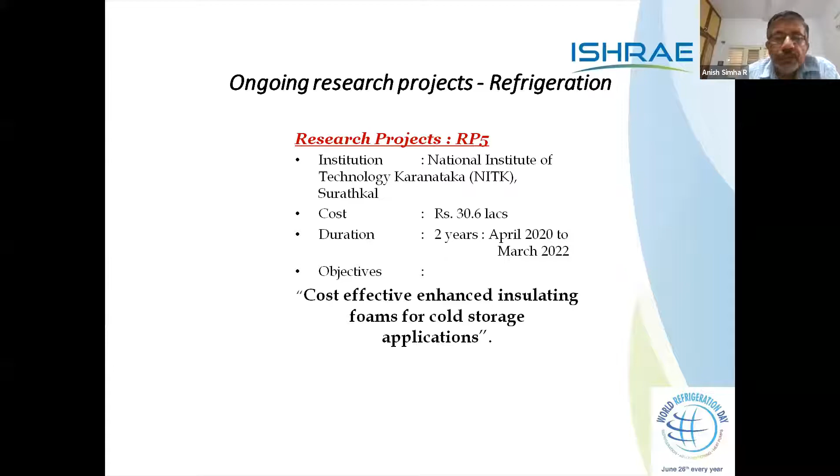So with this, now I would like to introduce the speaker of the day, Mr. Arun Kumar Bhatia. Mr. Arun Kumar Bhatia is from the TED Consulting Services. He is the founder and the technical head. He is an accomplished professional with 26 years in the industry with hands-on experience in industrial refrigeration, commercial refrigeration, project management, skill upgradation training, energy audits, and process cooling solutions. He has led and handled various projects with end-to-end responsibilities.

Member and follower of international associations, including ASHRAE, IIAR, TMI from USA. He is a Bachelor of Technology from the Mechanical Engineering Department from University of Kerala, India. He has a Master's in Business Management from Delhi. Then he has design of refrigeration systems for peak performance and efficiency from the University of Wisconsin-Madison, USA. He has attended skill upgradation training or workshops on sustainable solutions in global refrigeration industry from Mayekawa, Japan, GEA Refrigeration Europe, and GEA FES USA.

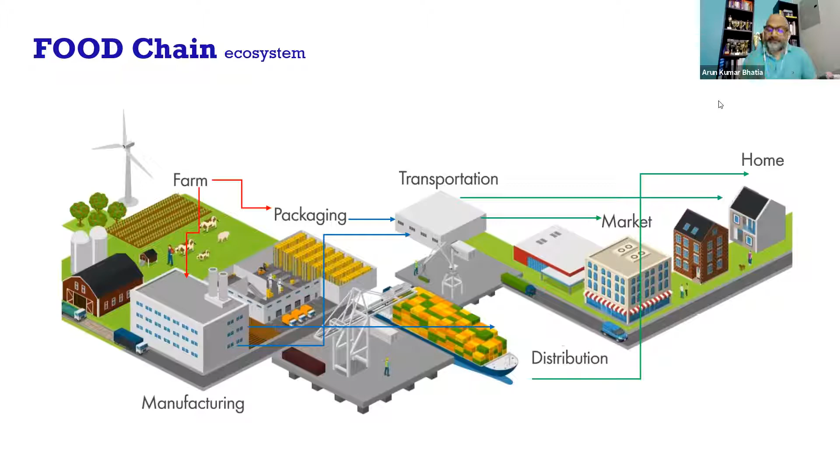Now this was about food. So food, as I said, food itself is energy. Many people recommend that you have to have this many calories and this much not. So even refrigeration is also about calories, kilocalories, watts, kilowatts, tons. So how does the cold chain ecosystem work? As per the United Nations Food and Agriculture Organization, they define cold chain like this: from harvesting to reaching a food outlet or a consumer, we should try to protect this energy chain in a manner that we have the least carbon footprint. We should have the most efficient operation without compromising on the properties of the food. When I say without compromising the properties of the food, it means we cannot afford to compromise on the temperatures of the food, because those are the most important criteria to maintain hygiene of the food. So temperature, movement and storage are the most important things in cold chain.

So if you start from the left hand side of the screen, there we have a farmer, fish farming or normal land farming. It is farmed and then it moves to a process factory or a packing factory, and then it reaches storage. So if on every step we maintain the respective or recommended temperature management, this will really help us to improve our food security, reduce carbon footprint and make this environment better.

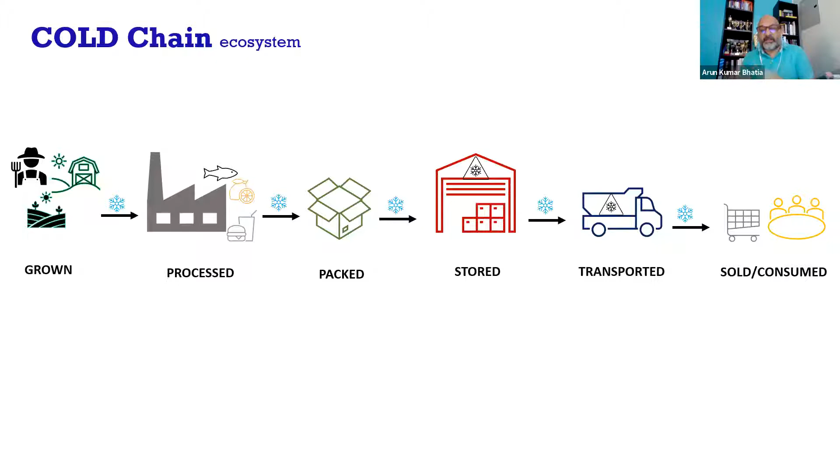So this definition was really awesome, which I learned recently, and if this has been understood, then I think most of the points are clear. This was in one of ASHRAE's blogs. The cold chain is a series of actions and equipment. So here we have to make a deep understanding of the statement, series of actions and equipment. A technology company can manufacture equipment, right? They can give you the most energy efficient equipment. If we are not able to install it properly, then that equipment becomes of no use. No use in the sense that we may end up consuming higher energy, or we may end up damaging that equipment at the end. We are not doing good for the environment.

So the cold chain is the series of actions and equipment applied to maintain a product in a specified low temperature range from harvest or production to consumption. When we say actions, these are our experience, our common sense, our best practices, which we have to apply along with the technology and equipment. So it is a balance of our knowledge, experience, and best practices along with the equipment and the technology. We will see how it goes.

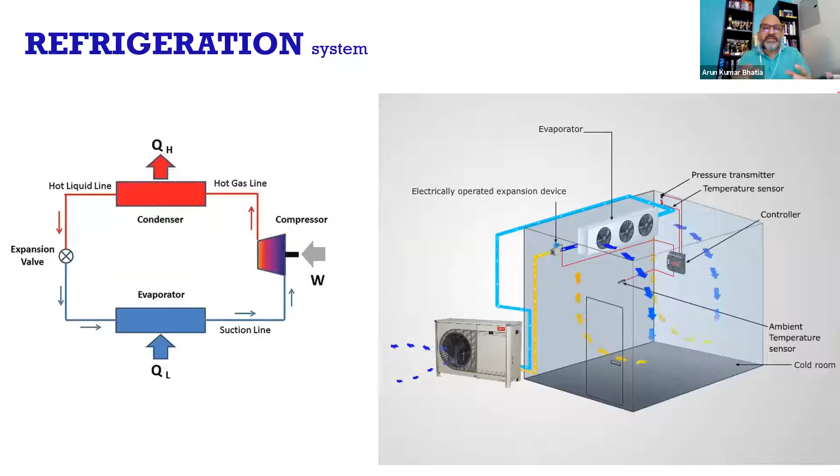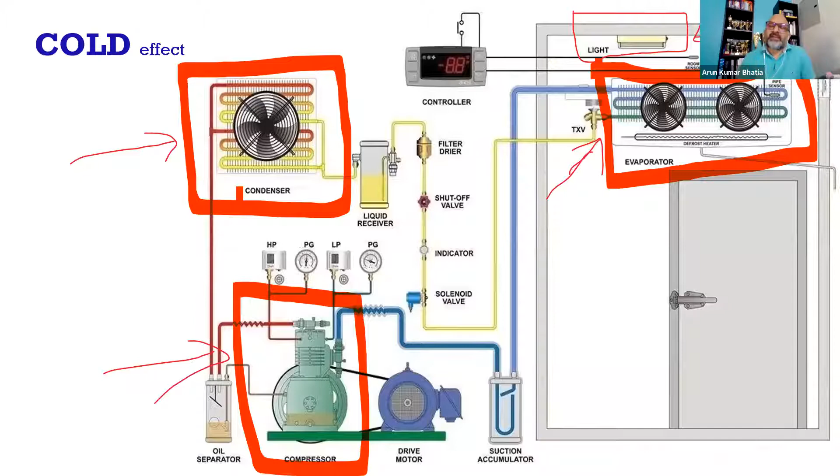But when we go into installation, establishing a cold chain, consulting, project sales, or as an investor investing money, we have to look deeper into the subject. It is not only the compressor and the fans where we can save energy. There are a lot of opportunities in the cold chain, in a cold store or in a processing factory, to save energy. As I said, for students it is the fans in the condenser and evaporator and the motor in the compressor. These are big opportunities to save energy. And of course, there are some lights which consume a minimum amount of energy.

Now I always love this statement, food and energy, because we are so connected with energy. It goes back to 7th or 8th class when we learned the law of conservation of energy: energy is neither created nor destroyed, but changes its form. So we are in a circle where energy is moving around us, and we have to optimize it. If we use energy inefficiently, it will create more carbon, and that is not good for human living conditions. So humans, food and energy are connected in a circle.

As I said in the beginning, food is energy and energy is food. It may sound like a cliche, but I like to understand it this way, because I feel the connection between food, energy and humans is very basic. These are the American dietary guidelines. They say the average woman and man need 1,600 to 3,000 calories a day, which they consume in terms of protein, carbs, fat, vitamins, minerals and water.

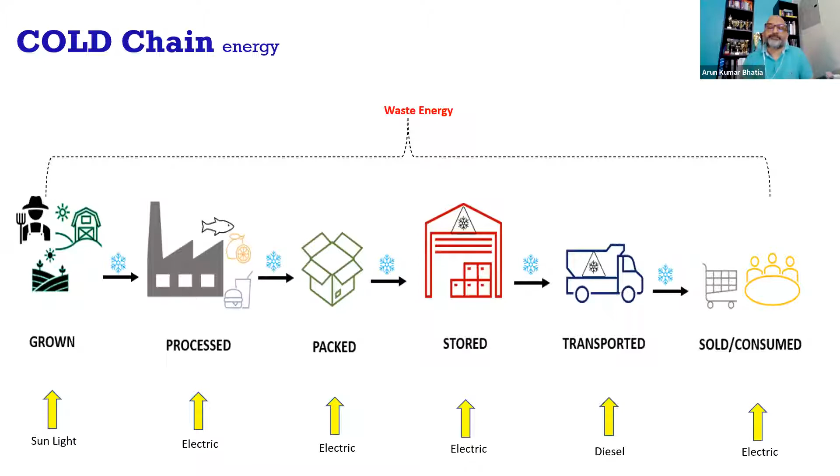So this is just some statements which say, and which is really alarming for us: in fact, up to 26% of world energy is used in food chain, directly or indirectly. I believe the number should be even higher, but this is the data I had from one of the United Nations websites. So this I have given you.

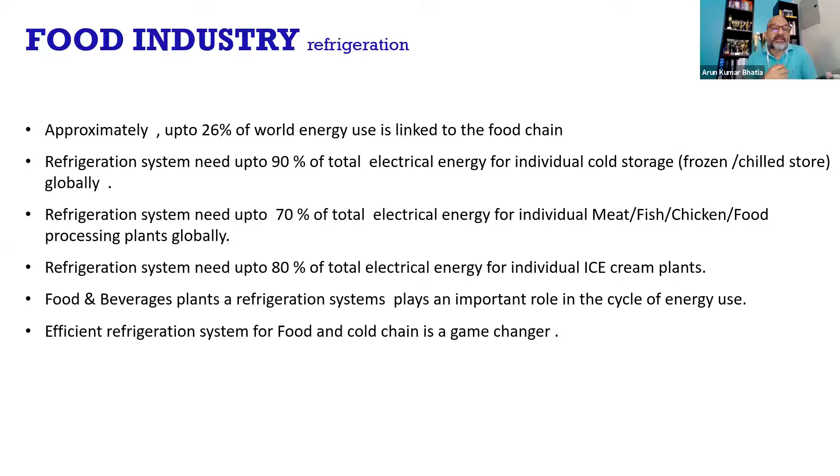Now, in a refrigeration system, for example a cold store, a third-party logistics warehouse with bigger frozen and cold chambers, 90% of the energy is used in refrigeration equipment. If you go further in the points, food and beverages use a huge amount of energy in their operations, and that is the reason we all believe our industry is the most energy intensive industry. And still we are in a developing country.

We don't have any greenhouse goals. If India has, then probably I'm not aware of it. And I think many companies I know in India have their own greenhouse gas goals. They want to reach the lowest carbon footprint. I have seen it in many companies' agendas, and even many contractors in the refrigeration industry maintain these standards.

But don't worry, this is for the students, those who are in college. I'm just trying to tell you, after 5 or 10 years, you will also go as a specialist, with a target for my cold store design, my cold chain and my food processing factory which I am involved with as a stakeholder. Stakeholder, when I say, you can be a technician, an engineer, an investor, a panel supplier, a door supplier, or a service provider.

So as a stakeholder, when you as a student get into industry after 5 or 10 years, this will be the most important factor: in a design they will ask you what energy saving you are going to get.

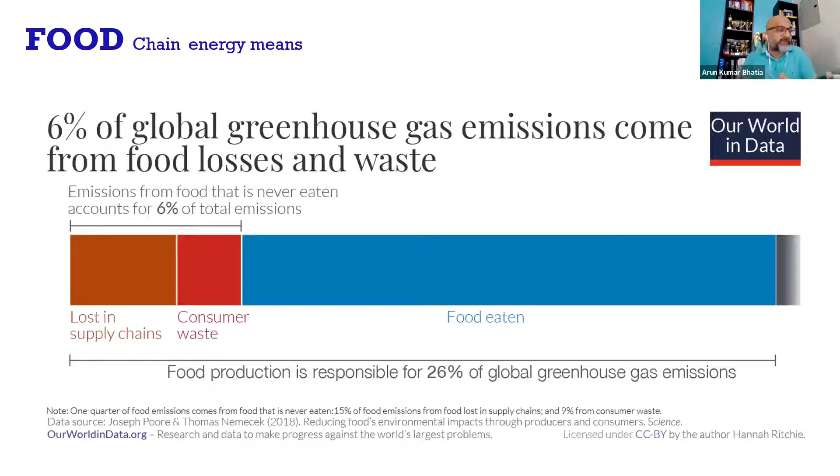So this is the data from Our World in Data. 6% of global greenhouse gas emissions come from food losses and waste. Now this food loss and waste does not only happen because of refrigeration, it also happens with the practices we follow as cold storage owners, technicians or service providers, because we are not aware of it, or sometimes we are aware but we are not able to diagnose those things because nobody is telling us to do it.

Yes, we only raise our ears when we hear that we are losing in our cold store operation. Then we start looking and digging into things and trying to make this more energy efficient.

Now, if you see the bottom, you see the vegetarian foods. Here I'm not trying to tell you that you should turn vegetarian, because one United Nations definition of food security is that you have a choice to choose your food. It can be vegetarian, non-vegetarian, or vegan food. Yes, you can choose any food.

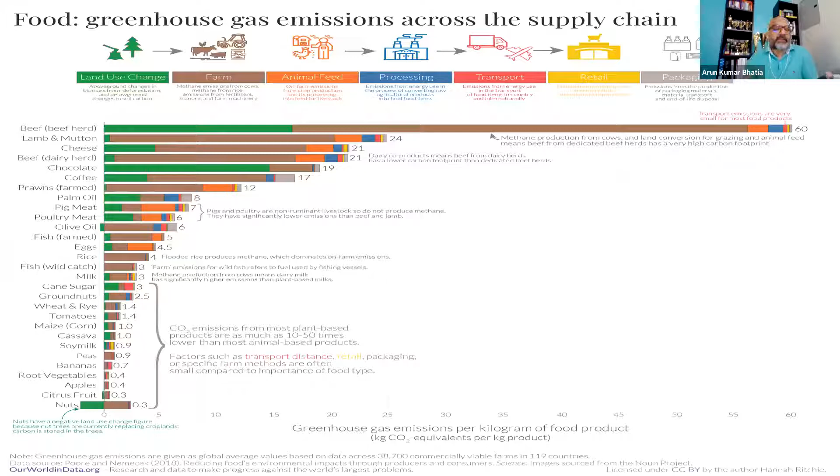But why I'm trying to share this is because you as a student or a stakeholder can understand how much greenhouse gas is generated with certain types of food. So when we know, then we can avoid those things. So this is also per kg.

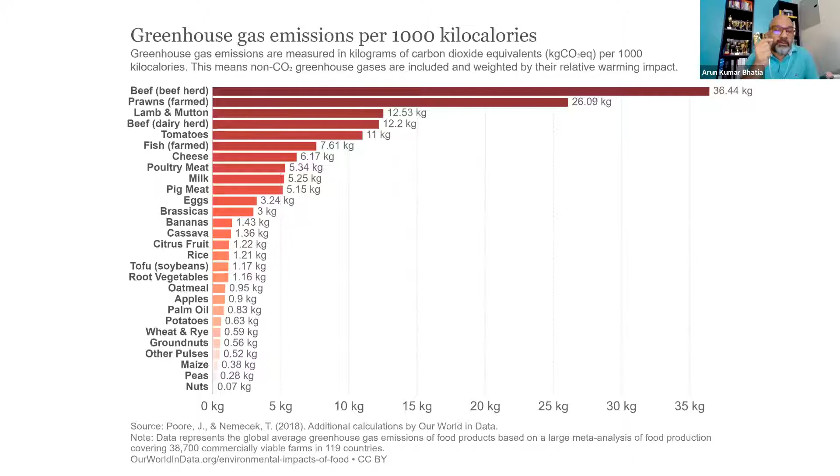For example, if you see the nuts, they produce 0.07 kg of greenhouse gases, and banana, if you go to the top, it says 1.43. And then at the top, prawns, which we are farming in South India, are doing around 26.09 kg of CO2. This data explains what CO2 generation we are doing.

Now comes another milestone. We have cold chain. Now how can we save the energy? If we look into it, we can think compressors, condensers, whatever moving parts we have, we can save energy, right? But we have to think a little bit more and do a little bit more. Let's see. Let us try to understand how we can save energy in a running plant or a new plant which we are planning.

So first, as a stakeholder, we should have a roadmap of energy. What we want to do, what is our target, how much energy we want to save, and we should not go and say this cold store is doing this much energy, that cold store is doing this much energy, because every cold store can be designed in a different manner. That is the reason you have different components, different experts, different vendors, and of course, as an investor, you have to be smart about what your roadmap is.

So your target should always be optimum energy efficiency, because energy is the most important resource. And we live with the energy. If we don't have good energy around us, we cannot survive. And this I have already talked about, our industry is an energy intensive industry, correct?

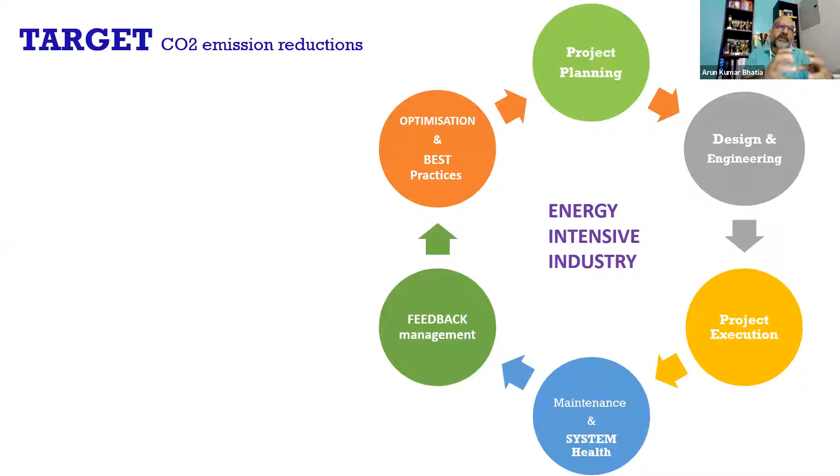Once you do this, you try to create your own best practices. Because, same way every body is different, but there are certain guidelines you have to follow to keep your body fit. Same way, every plant room has some basic guidelines, but other than that you have typical guidelines which you have to develop for that particular plant, with different things that will come later.

So, as I've already explained, the first stage is you optimize the heat load when you are at the planning stage, design engineering stage. Because, you know, it's a very strange thing that we as designers put so many safeties. I don't know why we put so many safeties. I think wearing two helmets will not save you from death - in fact, it will increase your chances to die.

This is what I tell in most of my trainings - overdoing things is always not good. Yes, try to do things with good intention, but don't overdo things. Overdoing things can cost you more - costing more means more carbon footprint, more inefficiencies. So focus on energy saving by components, that will come later, and accessories. If you have an existing cold store, what accessories can we add - that is also one important thing.

Now, maintenance methodologies - and there's one more thing. You have design on paper and design on site. These are two different things. So this is my humble request to all designers: they should have zero ego with the project team.

Because the project team is actually trying to help you build that project. Sometimes as a designer we become so egoistic, we don't take their feedback seriously. But keep this in mind - project team feedback is the most important. In fact, designer, project sales, and project execution - these three are very important for design improvement. So we have to be really cautious: design on paper and design on site are two different things.

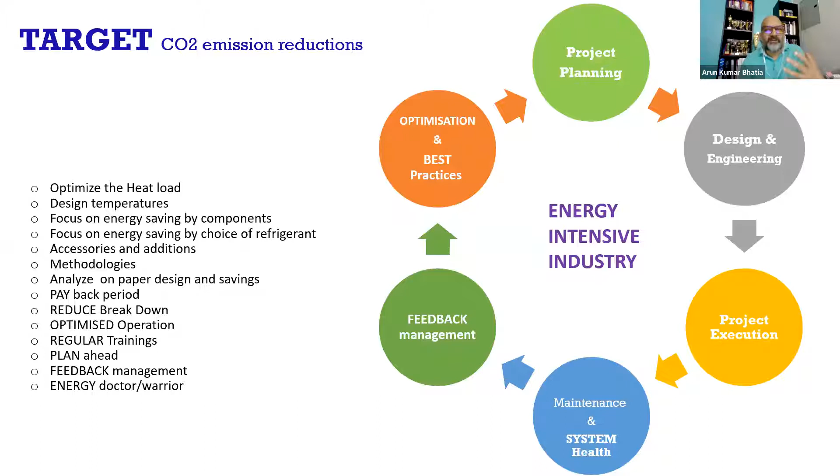Now we talked about two opportunities where we can save energy. One was because we are throwing away a lot of heat in cold stores and food processing factories.

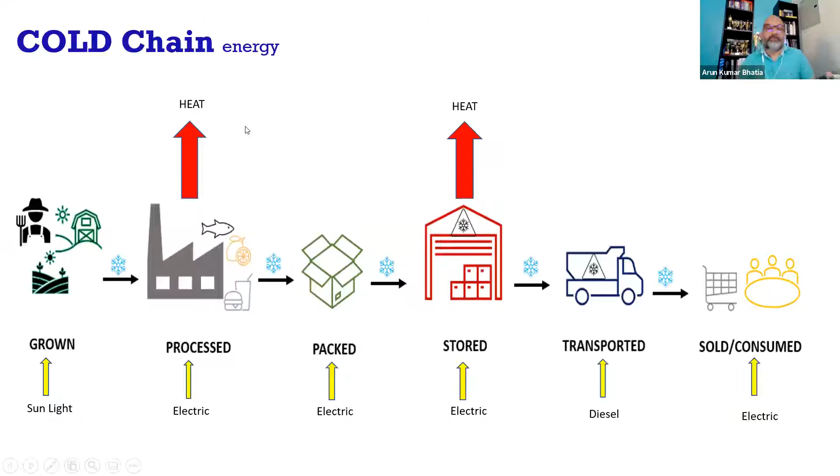Now let's see how we will save this energy. So first thing is, when we go understand what are my main consumers, those who are consuming most of my electric energy, then we can focus on them better. For example, when I was young, my focus was different, but now I'm old, so breathing is most important for me. My heart condition is most important to me, right?

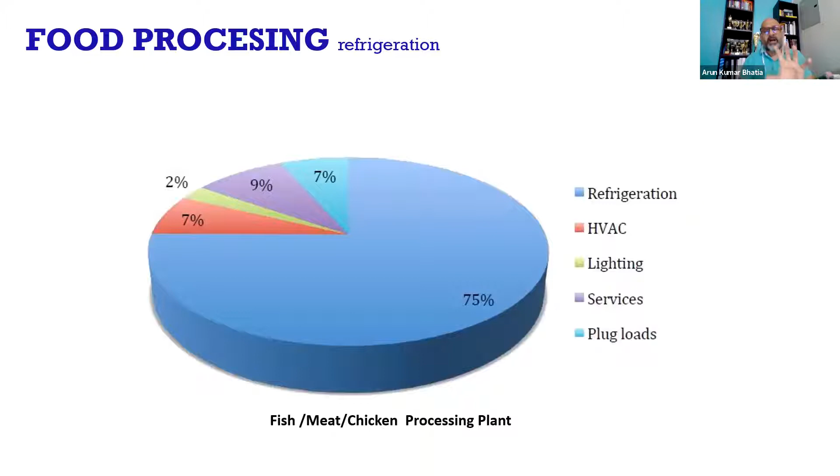So this is a typical depiction of a fish, meat, chicken processing plant with blast freezers, or where we have a high energy load. So this is a general understanding of how the loads are distributed, and then how we can focus on these loads and save energy.

Now you remember we discussed the loads. I have come across consultants, investors, even component suppliers, those who can influence the owners, like when you ask them, sir, you need a freezing chamber or a chilling chamber? He will say, both, make it both, right? And then you ask him, sir, you want blast freezing? He says, yeah, you put blast freezing also.

So we must understand, actually we must try to communicate this to the investor, because he doesn't know. I'm sure, as I said, many investors are smart, but most are not aware, because they are not experts of refrigeration. We are experts of refrigeration. You are experts of refrigeration.

You as a stakeholder, it is your important responsibility and duty that you should make him aware that if the sun is rising and more on that side, you should tell him, sir, you want to change your cold store positioning so that the transmission load should be reduced, right?

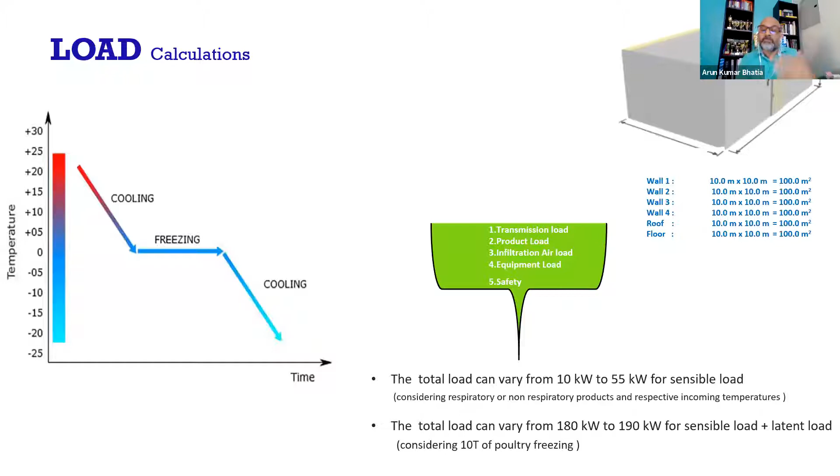So these are small points, and you have to also explain to him what is sensible load or latent load, how a room which is 1000 meter cube can have a load of 10 kilowatt if it's a packed chilled product, or it can have a 55 kilowatt load if you have respiratory products in them, and it can have up to 200 kilowatt of load if it's a blast freezer.

So this we have to understand, and when we understand this, I'm sure we know this, but somehow we are not able to communicate this to the investor. Why? Because we don't realize what our responsibility is. Our responsibility is not to execute a project, take our money, and go and sleep. Our responsibility is much bigger than that.

Our responsibility is towards food security. Our responsibility is towards environment. Yes, our responsibility is about energy saving. Even choice of the compressors, you have to be very wise

on choice of the compressors. So it depends on a project how you choose. You cannot say that screw compressor is better or piston compressor is better. Yes, as a designer, as an installer, as a consultant, this you have to evaluate considering different aspects, conditions, or ambience, how and what compressor to be used. All compressors and technologies mentioned here, whether rotary or reciprocating, they are good. But how we use it, as I said in the beginning, a good compressor can fail if it is not chosen for the right application.

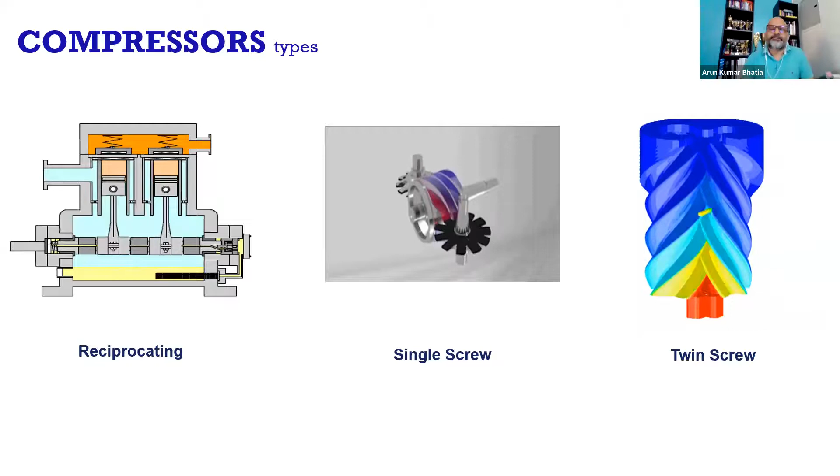Now, we all know that when we choose a compressor, yes, technology is important, refrigerant is important. You cannot use a refrigerant just because it's cheaper, for example, a refrigerant which is already banned or going to be banned, you should not choose it. And you cannot cheat your investor. Why do I use the word cheat? Because the investor does not know. Today you create a plant with a particular refrigerant which is going to be banned after 5 years. So what will the investor do?

He will continue buying that refrigerant and keep spending a lot of money, and what are we doing? We are not looking at the environment, we are not looking at energy wastage. So even a choice of refrigerant can help us save energy. Try to choose a refrigerant which gives the highest possible coefficient of performance in the compressor, maximum refrigeration effect with the lowest consumption of electrical energy.

Now the pressure of refrigerant is very important. For example, I've seen some contractors - I'm from Himachal - I've seen a plant where a contractor took a 40-degree condensing and minus 45 evaporating. It was a single stage screw compressor working for a blast freezer, and for some other freezer, plus 40 and minus 27. Now you don't have to do that, you have other options also.

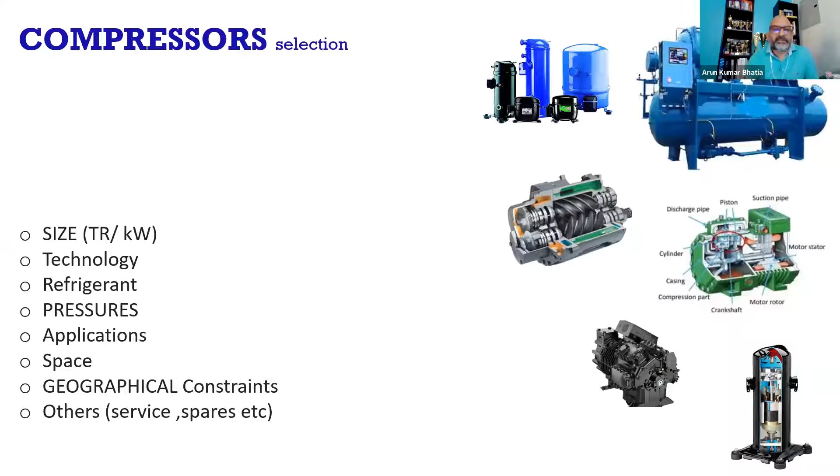Now condensers have a lot of opportunity for energy saving. For example, in evaporative condensers, if you're using a reciprocating compressor with ammonia as refrigerant, the temperature goes close to 100 degrees Celsius. So when your refrigerant is at 100 degrees Celsius, you have the opportunity to use desuperheaters. In a food processing factory, that desuperheater can help generate hot water up to 80 or 90 degrees Celsius. This is entirely a designer's way of using that heat energy to help the process industry.

You can also use air cooled condensers. In fact, in cold climates, a combination of water cooled and air cooled condenser is a very good option. I remember seeing this in Belgium long back, around 2005 - there was a plant that had both an evaporative condenser and an air cooled condenser, and they used a combination of both because they wanted to save water that is flushed out from the evaporative condenser, since they had to pay the municipality a tax for flushing that dirty, high salt content water.

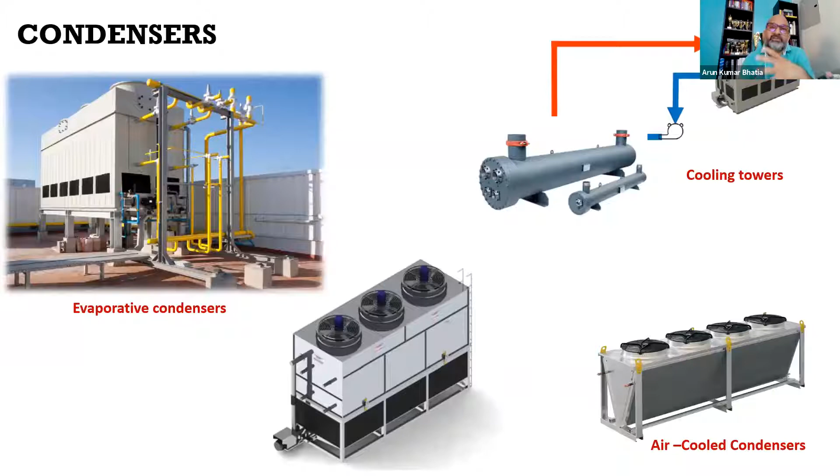After every 4 or 5 cycles you have to flush the water, so a combination of air cooled and water cooled condenser is a good option, because nighttime temperature at certain ambient conditions is very low. For example, in deserts, some places have a night temperature of 20 and a day temperature of 45.

Now even evaporators give us a lot of opportunity to save power. For example, here too we choose a lot of safeties, and we consider very high pressures for fans. Where we can use propeller fans, we try to use axial fans - sometimes it's just salesman smartness. Salesmen are so smart, they say 'Sir, I'm using an axial fan and this is very good,' but you have to really compare fan to fan. So I'm not saying which fan is good and which is not good.

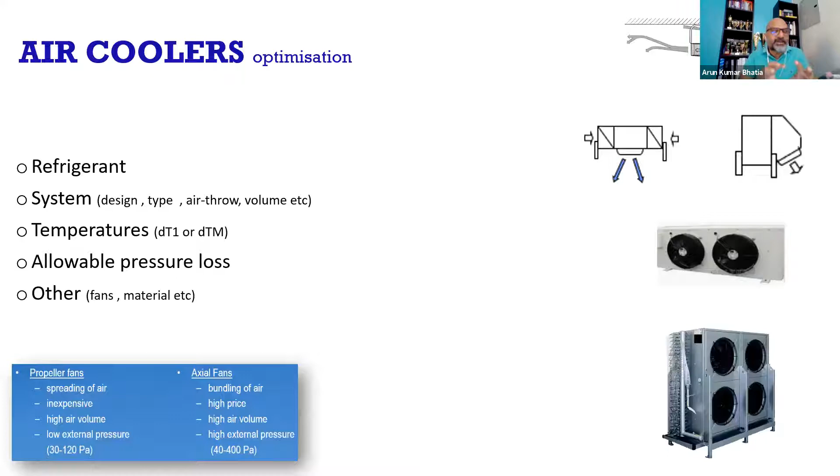What I'm trying to say is, as a designer, project manager, consultant, or project salesperson, we should honestly evaluate which fan can save power. In fact, a fan can save you a lot of power - I'll show you in the next slide how fan controls, even adding VFD to the fans, can save a lot of power. But we have to study it; only adding VFD to any motor will not solve the purpose. We have to see what our operational parameters are - that is the most important thing, and it has to be understood by the designer and consultant.

Now, these EC fans, I think they started becoming popular 4 or 5 years back in Europe, and some of the Indian customers which I have worked with, they bought EC fans and they started using these EC fans with their evaporators. So here I have given a typical example.

So if you have a 17,000 meter cube per hour fan volume, if you are using a standard AC fan and if you are using an EC fan, your power consumption is approximately around 14 to 18% lower. So imagine how much power you are saving. Normally here you are not using VFD. And the good thing about EC fans, what I learned, is that you don't have to use VFD also.

So with an EC fan, you can control the speed of the fan, I think with a 4 to 20 milliamps output. I think controllers and PLC guys know it better, how in a control mechanism they can modulate this fan speed with the temperature, and they save a lot of power. So with EC fans, you save on VFD, you save on power, and at the end, you have an efficient operation.

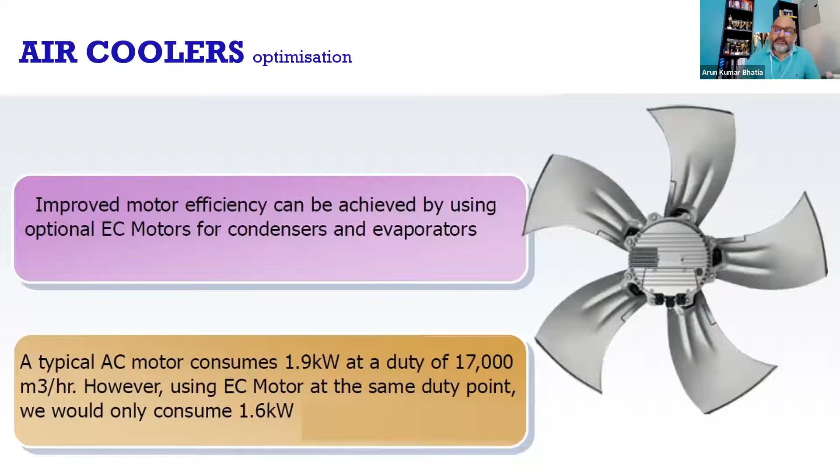Now the next thing is motors. Motors play important roles, not only for evaporators but compressors. They consume a lot of power. So normally in industry for refrigeration, we are using IE2 motors, right? IE2 motors are efficient motors, but in this part of the world we started using even IE4 motors, which are next generation motors. So first IE1, which is standard efficiency, which we get from 2 pole to 12 poles.

So the lower the poles, the higher the speed, right? This is the way we talk. So the higher the poles, the lower the speed. So I have seen some plants in some states, northern India, some potato storages and some other storages, they're still running lower RPM compressors and lower RPM motors.

So my message to them is, they are thinking that they are very smart, but they are not smart for the environment, and they are not smart for the investment they have done, because they have to upgrade their plant and they have to change the motors to high efficiency motors. And we will learn in the next slide how an investment in a motor can pay you back within a year and a half.

And finally, these are IE4 motors, which are super premium efficiency, with which for 60 hertz countries we run screw compressors at 3600 RPM and piston compressors up to maximum, I think, 2000 RPM. And so the motor plays a very important role. I don't know when IE5 is coming, I'm not aware of it. So you can search, but my knowledge is limited up to IE4 motors.

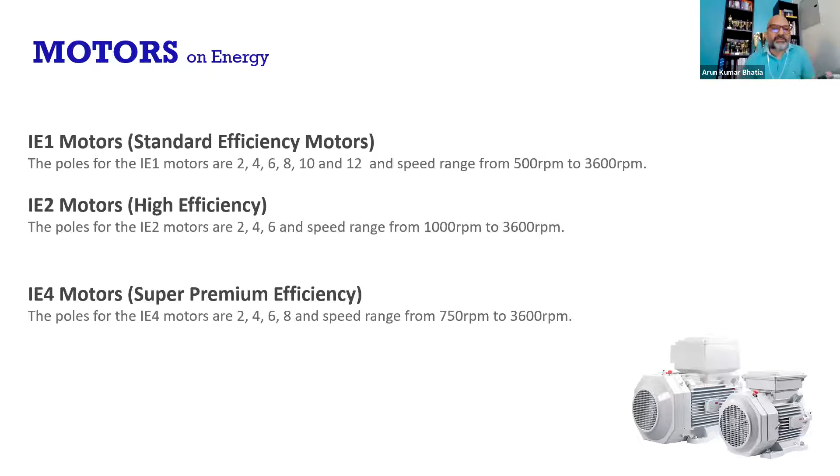So this is an eye opener for me. When I learned this, that a motor, if you see motor cost as an investment, it is not a cost at all. So maintenance cost and purchase cost are bare minimum for a good standard motor, right? But the payback is very fast, because if we are using a better efficiency motor, the payback can be very fast.

If you see the yearly cost, like on the left hand side, there is a source, EUP. I have taken this 11 kilowatt IE3 motor with 4000 operating hours and a 15-year life cycle. They say that the cost of buying an electric motor can be deceptive. Somebody will come to you and say, sir, my motor is 50,000 rupees and the other person's motor is 70,000 rupees. So why? Because he's giving you a lower efficiency motor, which is older technology.

So you don't fall in the trap. The trap, I call it, is similar to a honey trap. It is a trap of greed, where you save money but you become penny wise, pound foolish. So as a designer, as a consultant, as an installer, as a student, you must be aware of these important facts. Now on the right hand side, you see the energy efficiencies of IE1, IE3 and IE4 motors.

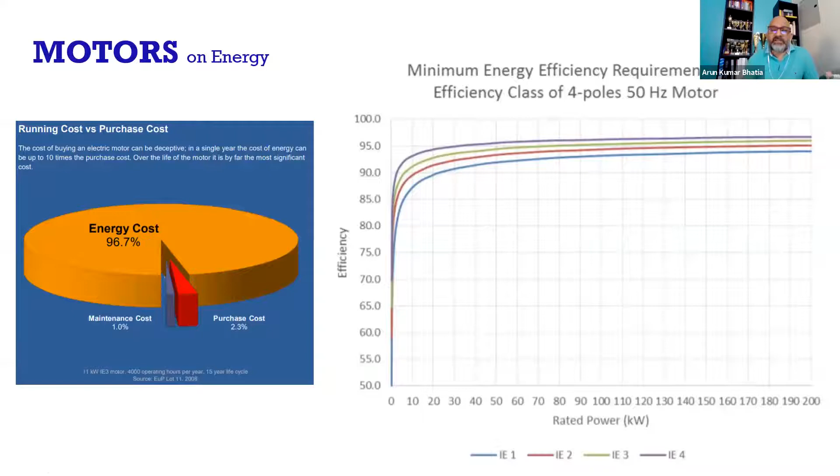Now finally we come to isothermal products, which as a refrigeration engineer, contractor, student, or mechanical component manufacturer, we don't pay attention to at all. 10 years back, I was also not bothered about what doors we are going to use, what panels we are going to use. Really, I didn't bother.

I never bothered because I didn't have the capacity to think in that direction, because I'm a mechanical engineer. I used to think that my knowledge in refrigeration is very good. So if my refrigeration components and plant design are efficient, then I can make this a good power saving platform for my investors. But I was wrong. I learned with time, and there are a few things which I'm sharing with you.

For example, a good dock leveler and dock shelter is very important, and here you do a lot of energy saving. Now in a plant room, I'm generating cold effect. But imagine that cold effect is leaked through these panels, which is an insulated box, or through a dock leveler or docking doors. Little leakage is the same as when you have a scarcity of water, you try to bring that water, and there is a leakage on the way. That leakage is just loss of energy, loss of money, and loss to the environment.

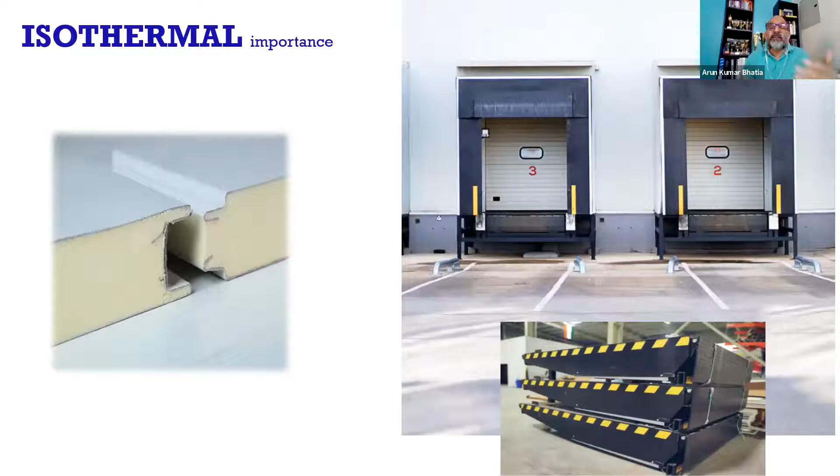So the same way, we must try to understand that these doors are very important, most important. And I will show you my calculation based on Indian conditions: how can a good door save money for you? Now this is for a standard door, for which I have done a case study with a European manufacturer. Here we have taken a door of 900 mm by 2000 mm, which is 0.9 by 2 meters, and considering Indian conditions, per unit cost of electricity is 13 per unit. This is for a typical freezer store, considering anteroom temperature at 15 degrees Celsius.

This is just to explain as an example. The power rate can be a little higher or lower. What we are trying to learn is how much investment in a good door can get you money back. So if there is a 1 mm leakage in a door or a panel, each day you are losing approximately 760 rupees of energy. Now you think that you are making a lot of money by renting this cold store. You may think that 760 rupees is nothing.

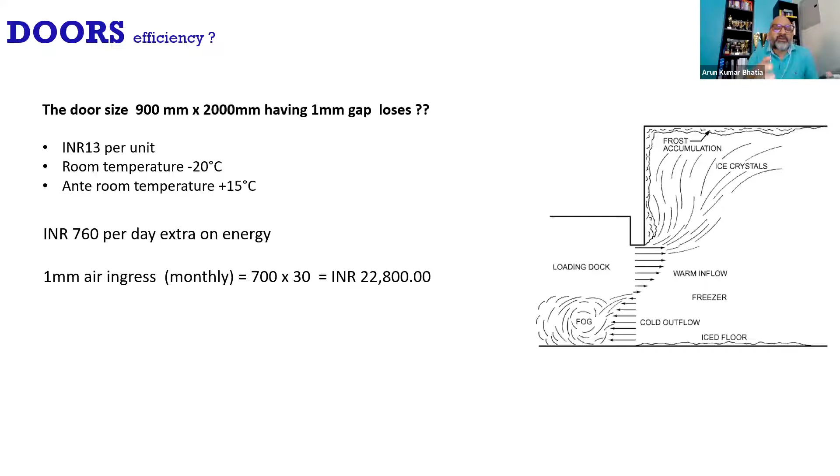Of course you can think that way, but then you have to realize that you have a responsibility towards the environment also. India is a country with a shortage of power. Your responsibility is to support the initiatives of governments, state or center, for saving energy and helping them maintain grids. So monthly you have 22,000 saving. When you calculate this yearly, oh my goodness, this is 3,650 United States dollars. And I'm sure the cost of that good door will not be 3,650. I'm sure you agree with me.

I never thought this way 10 years back. But today, when I do any project, any energy audits, or any meeting as a stakeholder with my customers, I bring up these important points. And I don't buy just any door. I buy a good door after understanding the technology and after a detailed evaluation.

Now a question comes to our mind. As a contractor, you have no say on doors or panels. Of course, you have no say. You cannot tell the investor what door or what panel to buy. But it is your responsibility to send him a nice email or give him nice advice. As I said, always put in writing how much a good door can make a difference.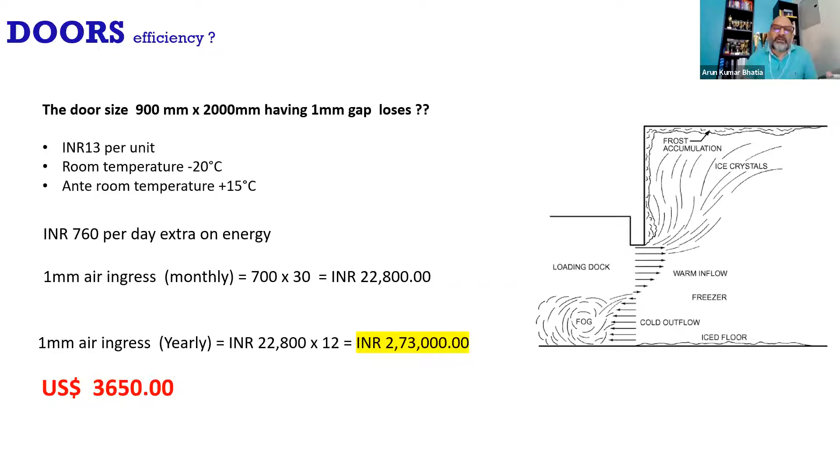So air ingress is a very important factor. Your compressor, your cold store, your plant is efficient, everything is great, but if you are leaking that cold effect, you are losing a lot. Now you may say that you will use an air curtain, but of course, they also consume energy. Ultimately, you are not going to save energy if you don't have a good door and good isothermal products.

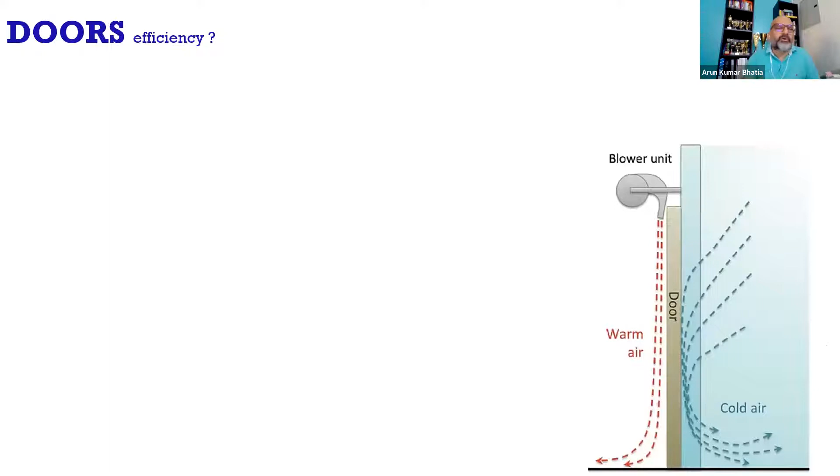Now, this is for bigger doors, where the anteroom is at plus 15 degrees Celsius. This case study I have done considering third-party logistics. Normally, third-party logistics in this part of the world maintain minus 25 to minus 28 for freezer and 0 to plus 4 for chilled application.

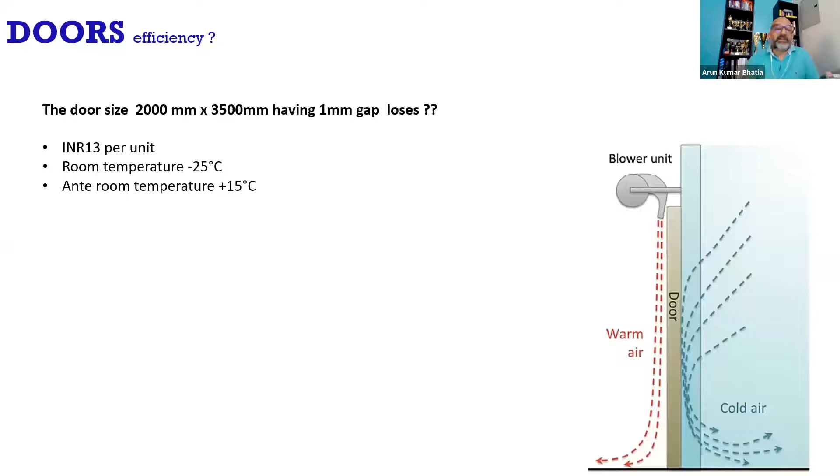So considering anteroom temperature plus 15 degrees Celsius, if I calculate same Indian conditions, I am losing 50,000 rupees a month. And if I see yearly, which is like each 1 mm leakage from a door, we are having $7,900 US yearly. I'm sure the door cost is never like that. So this I'm saying,

any manufacturer will claim the doors are good, but door efficiency or any refrigeration plant efficiency will actually be tested after 3 years and further. First 1 to 3 years, everything runs smooth. But if you really want to assess a good manufacturer, just go to a plant which is running 3 years and older. So this is what my experience is.

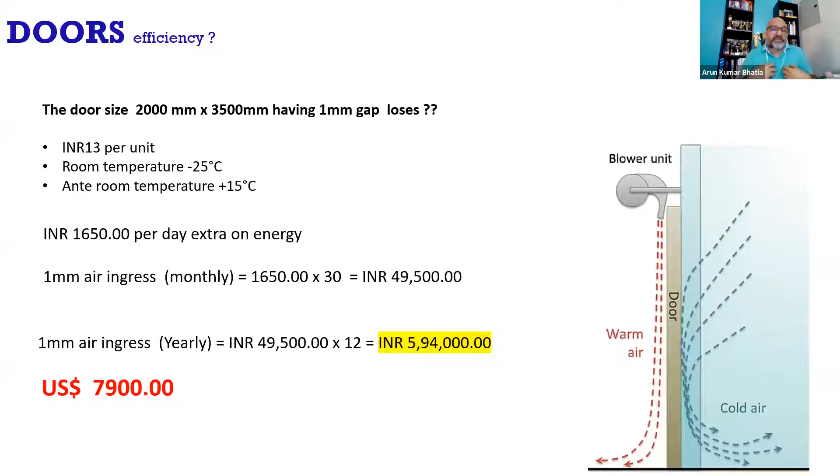Now doors, what extra solution can you go with for saving energy? Yes, you can go with the high speed doors, which is very important for chilled stores, freezer stores. I have done some installation with my customers. Even they had existing cold stores. And we found out results also. And the payback was really exciting. And my customers were really happy.

Because sliding doors take a lot of time opening, closing. And in that case, you can really use high-speed roll-up doors, which can have a velocity of 1.2 meters per second, how fast they move up and down. And they don't have manual operations. You can use a radar or you can use remote. And for freezer room applications for my customers, I have really done case studies, which I can share with you personally, not here. And then combination of doors, how they can help you save money.

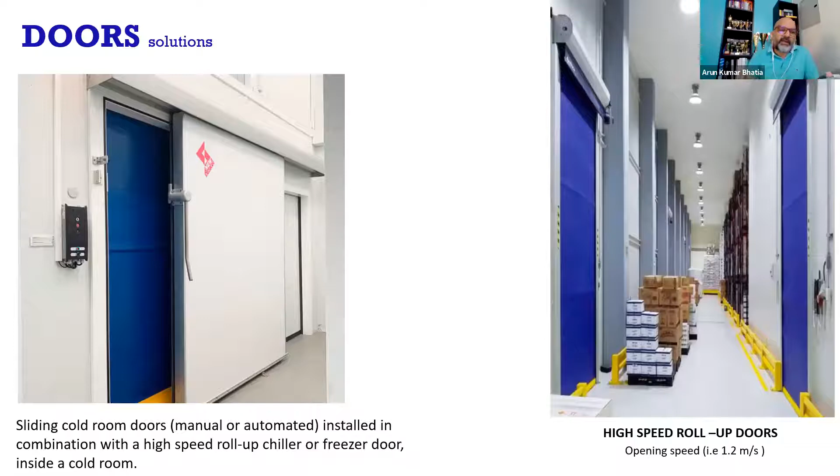Now the final stage is what action plan we can do. So first I always say that you have to train people, you have to make them aware. For example, 10 years back, I was not aware how important a door or an insulated panel is. I'm not saying I was ignorant, but I was not aware in the detail that I am today.

So today, if you are aware what you have to do, what is your roadmap to energy saving, then you can consider that target in your mind. You can put that target in your agenda. And based on that, you can develop your own action plan, and have external auditors who can help you realize your energy goals in various ways. He may give you solutions, he may give you modification of the plant, he may tell you a few techniques to save energy, or he may train your people for better operation and setting up best practices to operate a food processing plant or a cold store.

So when these people are trained, they will start working in line with the design. When I say in line with the design, I mean the design of that particular facility and cold store. For me, I believe that every facility is different from every other facility. Okay. Same way, every body is different from any other body. Of course, there are certain basic things which we have to follow, but operation-wise, every cold store or every processing factory, in terms of energy saving and refrigeration practices, is unique, and we have to set up unique practices to make it an energy efficient system.

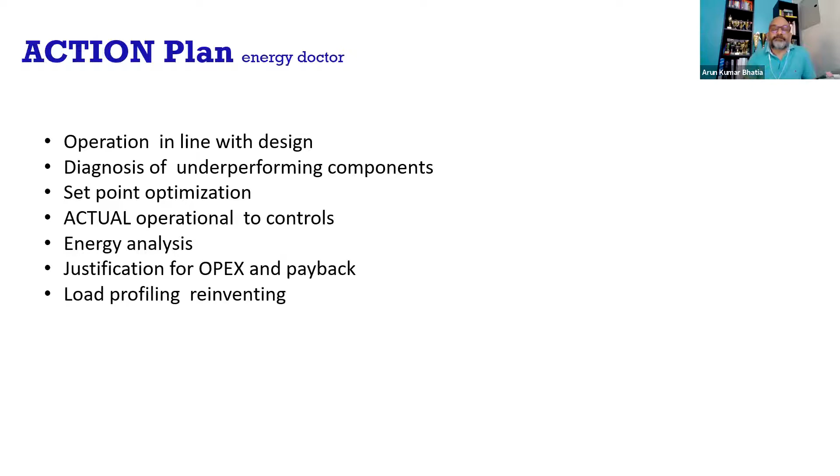And load profiling, yes, it is important. And operation, which is a very crucial thing, which you have to do as per your choice, like safety always first, maintenance guidelines you must have, operational guidelines, data management. For example, how your cold store is operating monthly, opening and closing time, how much air ingress, all this data can be collected on a monthly, weekly, yearly basis. And then you can improve on the basis of data.

And trainings, not only for operators, in fact management trainings. Those who have no clue about cold stores should also be trained, and they should also be made important stakeholders, because the responsibility is to save energy. And then we should give rewards to whoever is helping us to save. Now we reach a target where we say that our target is optimum energy efficiency.

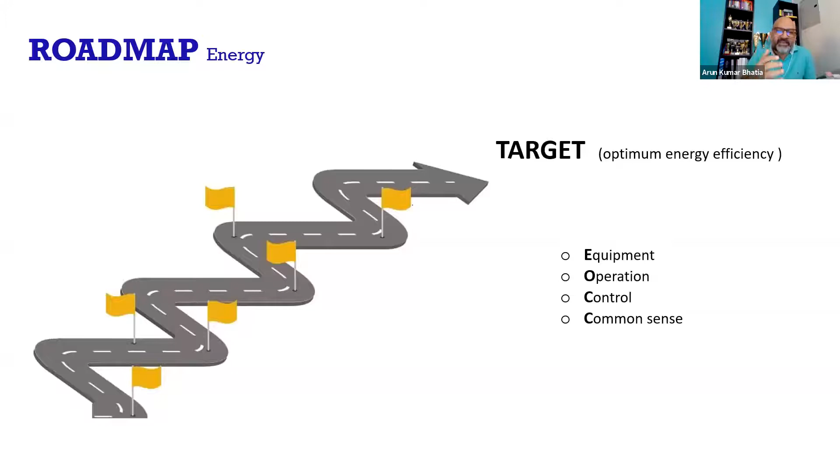I say equipment, what are the main things we have to look at? Equipment, operation, control, and the most important thing to use with the above 3 is common sense, right? So for engineers, common sense is most important. So focus on energy, how we can improve. We must secure a better future for all the stakeholders by using technology, systems, operations, and most importantly common sense to create efficient temperature management.